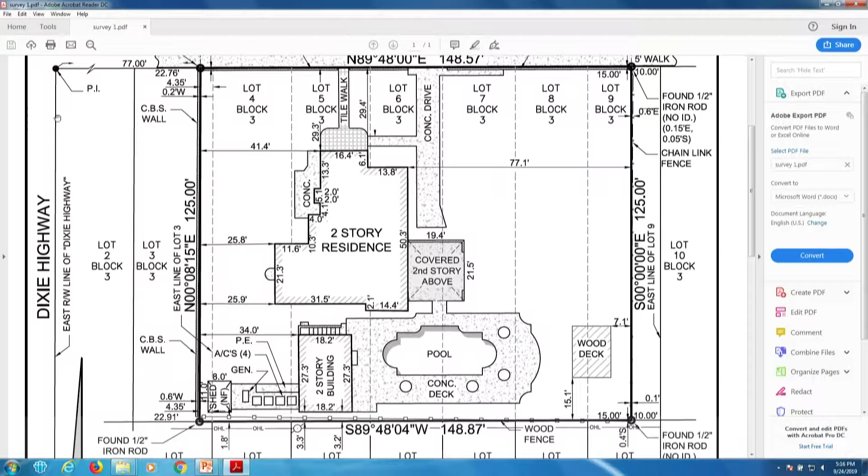This drawing, in the hatched area, actually explains the idea behind the design we are proposing this time. We are attaching the existing main house via the covered loggia with a breezeway that will connect to the 2-car garage and storage area. The open breezeway will be colonnaded with barrel tile and columns that match the columns at the front of the house.

We felt this was minimal obstruction—it kept the historic house intact, kept the fountain, the entrance, the curb cut, and the piers all intact.

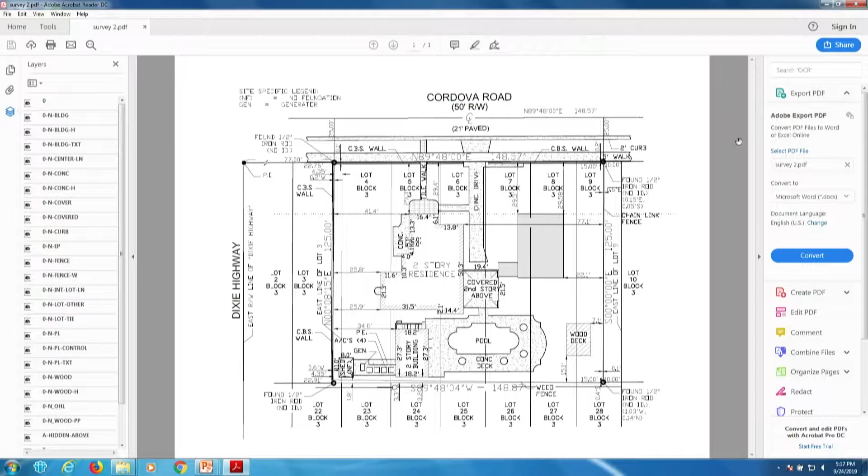This is the site plan in your package. This was submitted to Frederic, and one of his comments was that because this structure, the new addition, projected above the front facade of the existing house, it should be moved back. So what we've done since then is move the garage structure back to be in line with the main facade of the house.

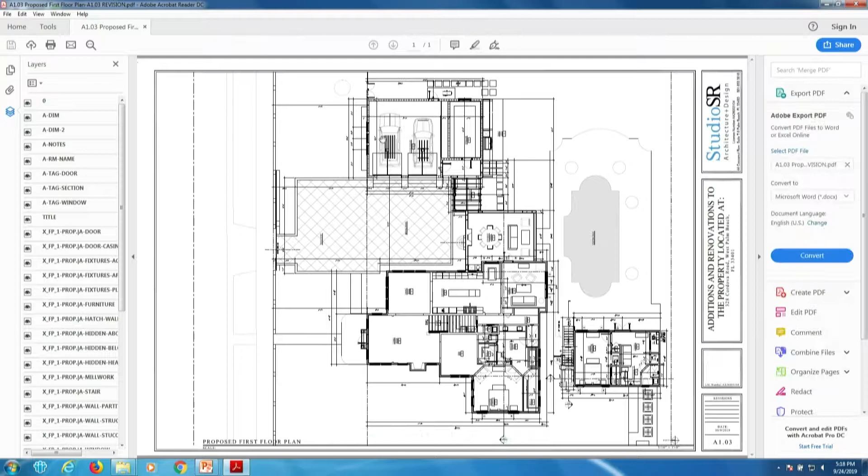I'll show you that. This is the first floor showing, on top, the two-car garage, the storage area, and this breezeway, which connects the two-car garage with the loggia. You can see this dashed line here from the existing facade of the main house, in line with the facade of the new garage structure.

We have a two-car garage for large vehicles, so we felt it necessary to provide a large backup area. We have 30 feet from the existing wall of the dining room, the west wall, to the front facade of the garage. It worked out quite nicely because we were able to fit this open breezeway between both structures, which will be below the existing one-story roof that's there.

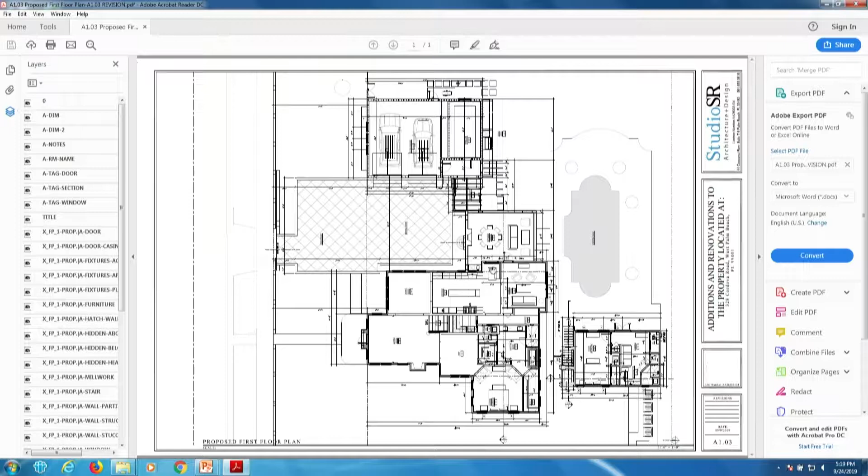So again, we won't have to go into that roof and remodel it—it stays as is, and everything is built below. We will also be remodeling the two-story guest house, along with interior renovations of the house, the master bedroom, and the area we're taking in from the loggia and enclosing it into AC space on the first floor.

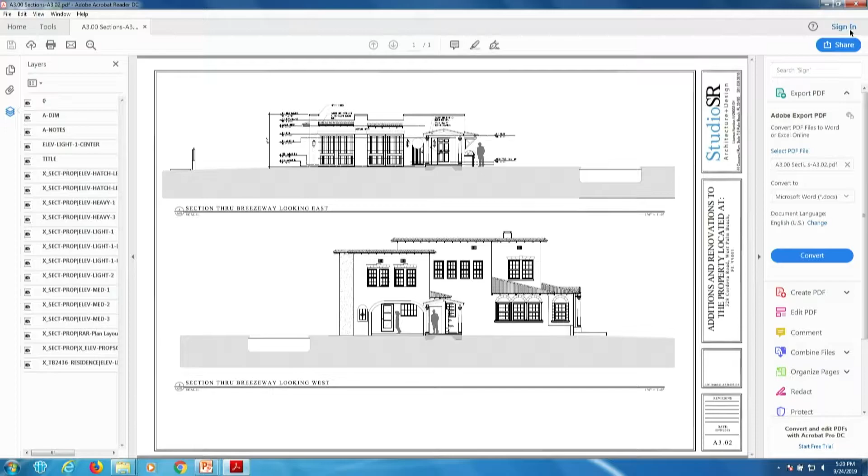I've shown here the existing west elevation, which is the front elevation, on top, and the proposed west elevation on the bottom, showing the garage with 3 windows on the front facade and a pent roof on the garage facade, typical of the rest of the house. It has these overhangs, which we felt was an important element to maintain in the design.

On the bottom here's the door of the garage, and immediately to the left is that new single-hung window, which has a vertical proportion found throughout the house, in the guest house and also the main house, same proportion, same size.

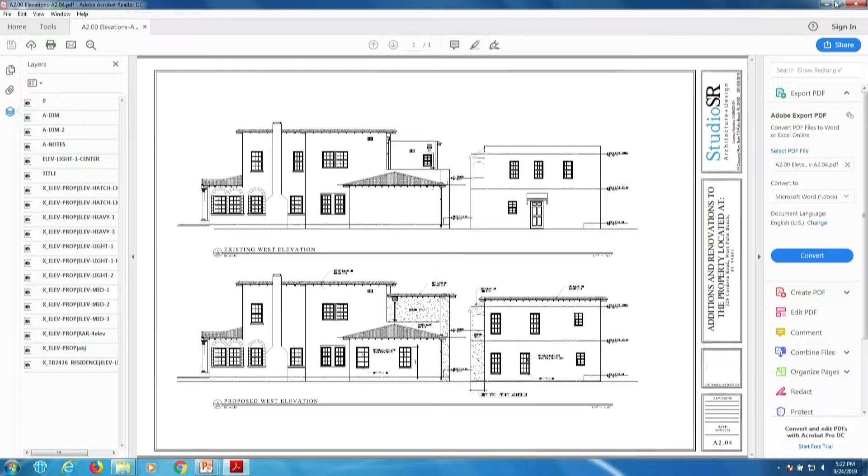Proposed and existing elevations of the guest house. The drawing on top, especially to the right, shows the existing north elevation with the wood stair, and then this landing for the second floor, which is in terrible shape.

So what we want to do is rebuild that whole section while doing the stair. It will have a little storage area underneath the stair and also this exterior shower area. There's a larger window on the south elevation because of egress requirements, keeping the single-hung impact rating consistent with the rest of the windows of the main house.

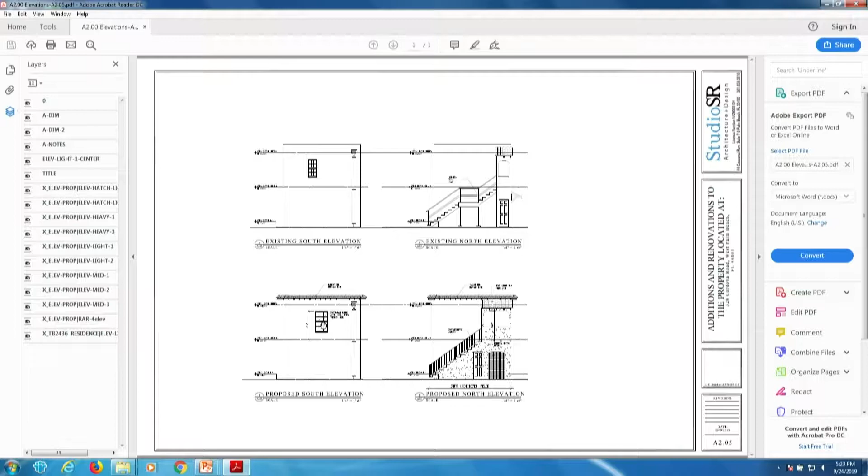And that concludes the presentation. Thank you. Any questions? Questions of the applicant?

Well, I'm very happy to see the redesign. I think it's very compatible with the nature of this contributing structure, which is really an important property within LCID. This is one of those rare situations where it has a lot of land associated with it, and you're able to do an attached two-car garage, which is much more appropriate. So thank you for working with us on it, we really appreciate it. We did take the board's comments very seriously when we started here.

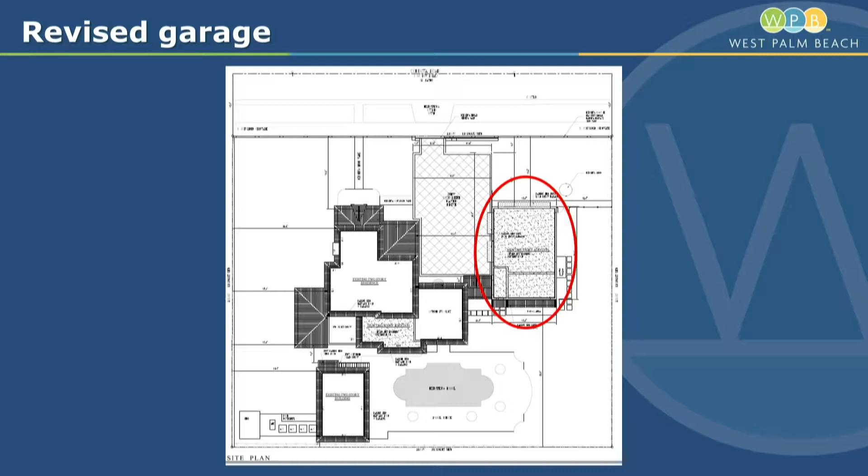Ms. Mittner? Yes, thank you. I don't think there's a whole lot more for me to add. I think he covered all the modifications and revisions taken into consideration from the board's direction last meeting, so I'll skip ahead, pointing out where the garage is located, side loading, which was board direction. The one-story element does read as separate, even though from a zoning code standpoint it's a solid roof, so it's considered connected.

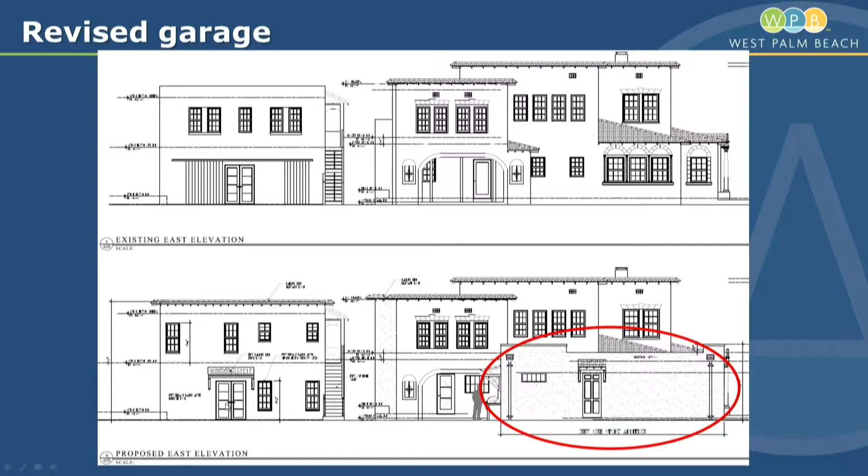This is the side, and as you heard, he's already addressed the window and the rear, plus the alterations and additions to the rear and accessory structure, which we were recommending approval of before. We now feel it fully meets the Historic Preservation Ordinance and Secretary of Interior standards, and the condition that the garage shall be aligned with the front facade. That's a little less than the 3 feet we originally recommended in the staff report, but I think this is the intent of the alignment, and he clarified that, and again the window should be vertically oriented.

So we do feel the revisions presented tonight meet those recommendations. Would you like those conditions still included in the motion, or do you feel with the updated plans that it's been addressed? I believe it's been addressed, so if you could just cite the plans presented this evening, I think that would cover it. Okay, thank you. Do you have any questions of staff?

Okay, thank you. Now we'll open it up to public comment. I have one card, for Mr. Simpson.

Good evening. Thank you, Historic Preservation Board, for all your work and service. I know El Cid certainly appreciates it. I am the president of the El Cid Neighborhood Association. My name is Steve Simpson, and I must disclose I sold this property to the owner, actually a couple of times, but the El Cid Neighborhood Association voted on this.

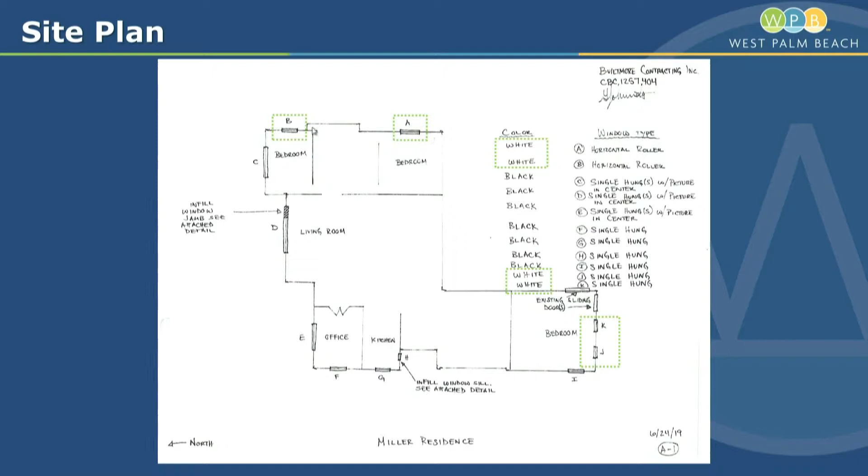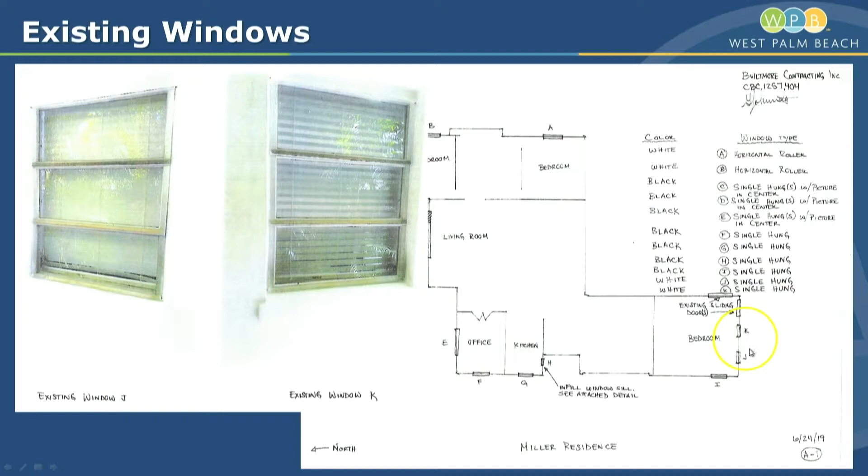This is the site plan, and these are the existing windows for J and K. As you can see right here, they're on the side. This right here is the existing door with jalousie windows that they're proposing to partially fill in. And this is window I right here as it exists today.

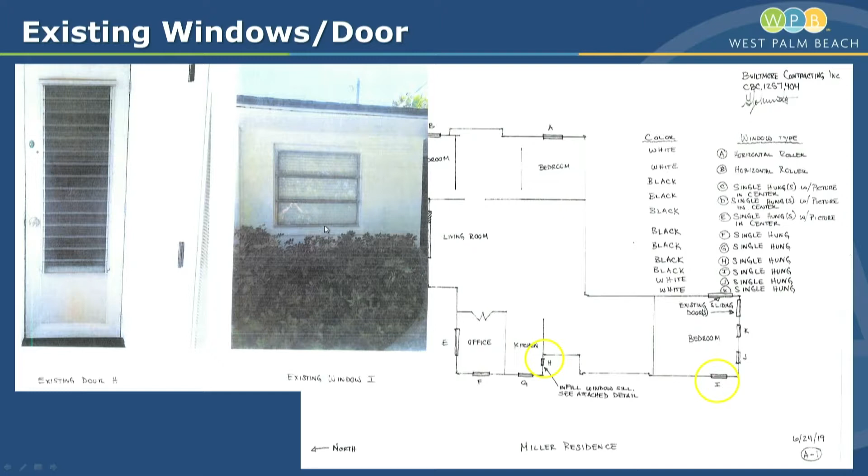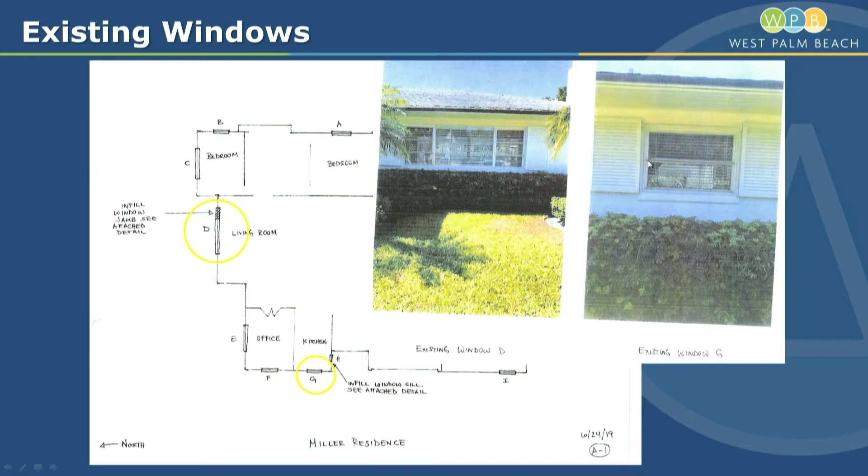Window opening D right here that currently exists is being proposed to be partially infilled, as the applicant mentioned, for a future project of increasing the master bedroom, I believe it was. And then window opening G as shown right here, and this is the corresponding window. Right here we have the existing window D as illustrated here.

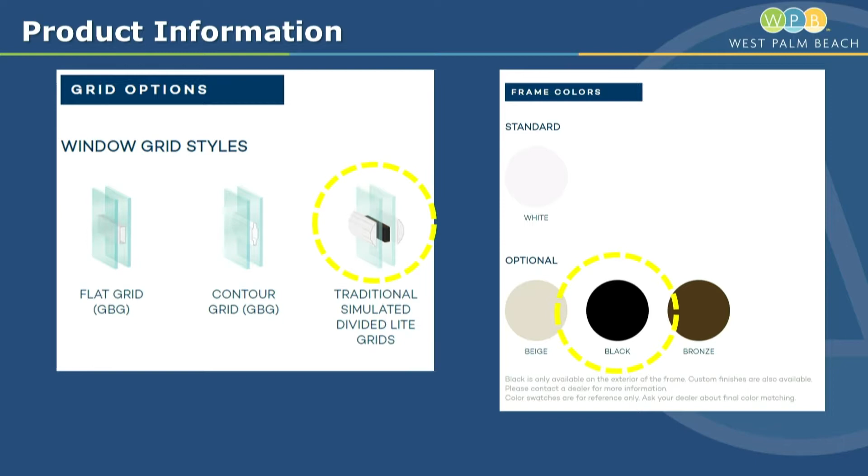They're proposing the infill of the existing door H, which is here, which is not readily visible. It is, while on a side street elevation, it faces a different direction, so it is not readily seen, and it is a jalousie door. So they're proposing to do a partial infill and putting a single hung window in its place.

The applicant did cite 259 Barcelona Road, which is a Mediterranean Revival home. It's a completely different era and time frame, and this structure actually has a combination of replacement windows and existing wood windows that were restored.

As you're aware, we don't regulate paint surfaces on already painted surfaces. The windows were already painted, and I believe, looking at the staff report, they were painted white, so painting them black would be acceptable because we don't regulate that. So in matching new windows with the existing restored windows, approving black windows was appropriate.

Staff has reviewed the criteria for alterations, and this does not comply with Secretary of Interior standards 6 or 9. For number 6, these are aluminum windows, as the applicant mentioned. An aluminum product is available today. Vinyl was not historically available at the time, and they should also match the visual qualities, color, and design when possible. For number 9, the infill, primarily on the Granada side, would change the rhythm of voids to solids, which is considered inappropriate.